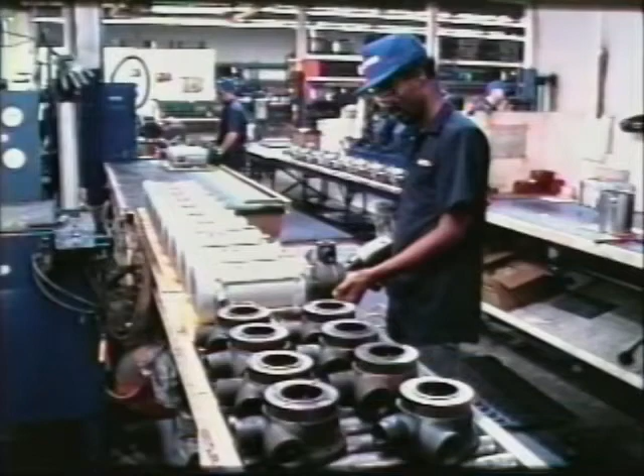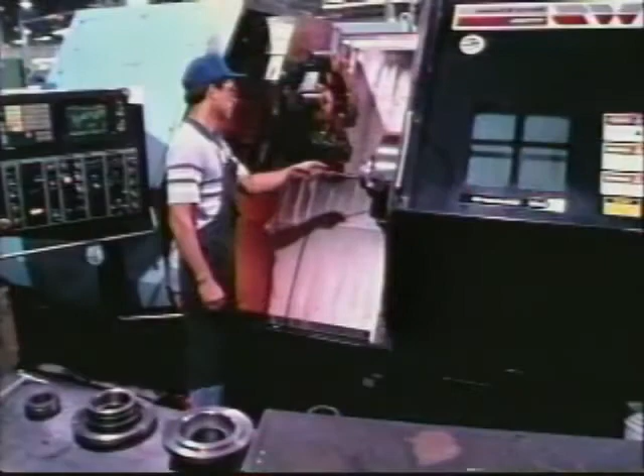Located in Oklahoma City, Oklahoma, CORKEN was founded in 1924 as a water pump distributor. In the early 1940s, the company entered the liquid gas industry and quickly gained market recognition for its quality line of pumps. CORKEN now has over 50 years' experience in the design and manufacture of liquefied gas pumps and is recognized as a world leader.

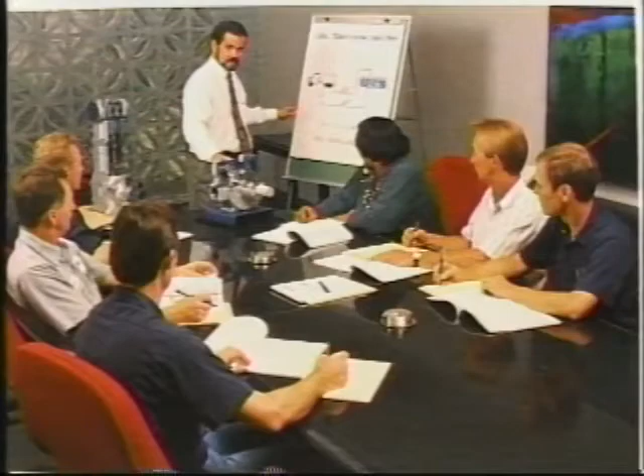Another key to CORKEN's success is its strong commitment to product training. Over the years, CORKEN has held product training seminars all over the world. This training video will explain in detail the proper procedures for disassembly and assembly of the Z-model CORKEN truck pump. The topics covered are safety tips, disassembly, assembly, troubleshooter's guide, tools required for disassembly and assembly, guidelines for installation, and guidelines for proper bypass valve settings.

Safety tips. 1. Periodic inspection and maintenance of CORKEN pumps is essential. 2. Inspection, maintenance, and installation of CORKEN pumps must be made only by experienced, trained, and qualified personnel. 3. Maintenance, use, and installation of CORKEN pumps must comply with CORKEN instructions, applicable codes, and safety standards.

4. Transfer of toxic, dangerous, flammable, or explosive substances using CORKEN products is at the user's risk, and equipment should be operated only by qualified personnel according to applicable codes and safety standards. Be sure to obtain and review all applicable instruction books and service manual pages before starting any of the following maintenance procedures.

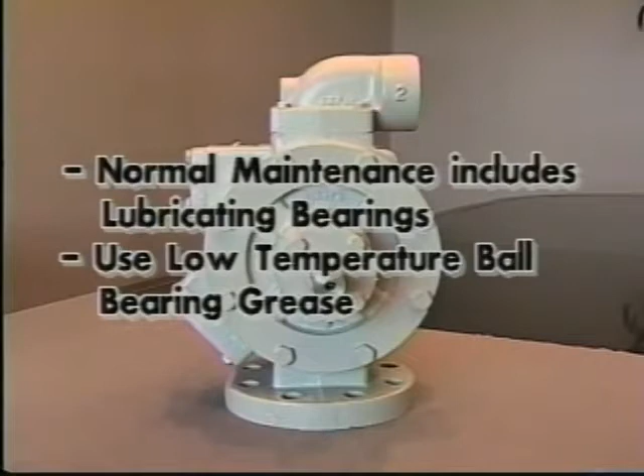This video is on the maintenance and repair of the Z-series pumps. This specific pump is a Z3200, but the pumps and parts and procedures are the same for the Z2000 and Z4200. Normal maintenance is only the lubricating of the bearings. This should be done every 2 to 3 months or as frequently as the truck is lubricated. Remember to lubricate the bearings and slip joints of the pump PTO drive shaft. Use a low temperature ball bearing grease similar to CORKEN part number 2302.

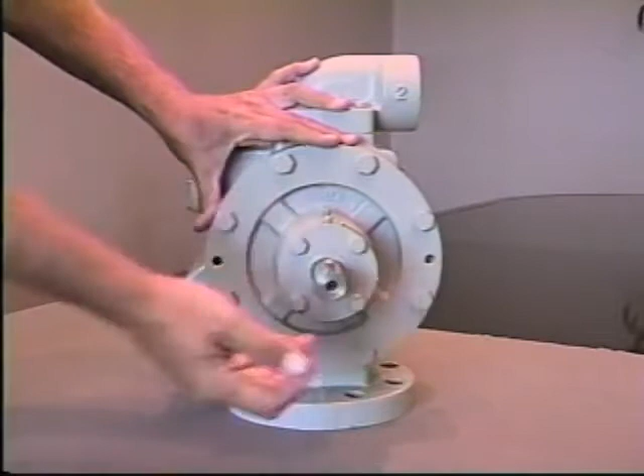Clean the grease fittings before lubrication. Be sure the relief is free to move on the bottom of the bearing cap prior to lubrication. The second relief fitting is where a seal leak would appear. Before disassembly, if there's a seal leak, inspect the bearings by being sure there's no movement in the shaft. If there's no movement, then the only thing necessary to remove will be the head assembly. The bearing area can stay complete.

Okay, to begin with, we're going to show the procedure for the seal change. The seal's the same on both sides of the pump. Before disassembly, check the shaft for movement. Be sure to check if there's any movement. If so, it's necessary to change the main bearings during the seal change. If there's no movement, it's not necessary to remove the bearing cap area or the bearings themselves.

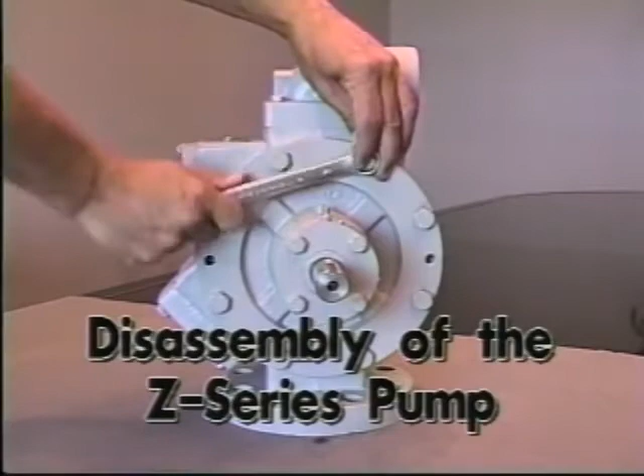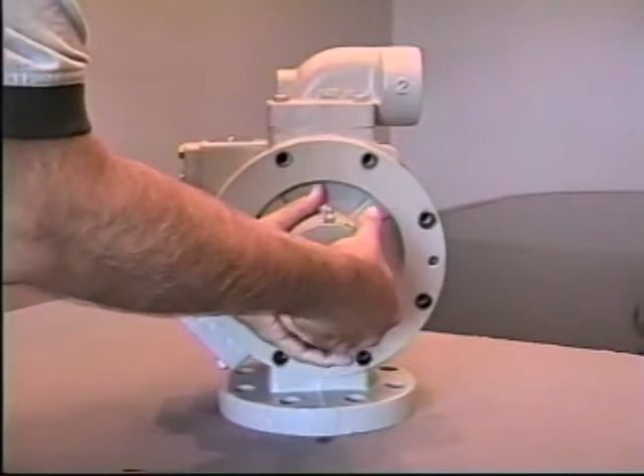To begin with, again, we're going to remove the head bolts, being sure before any maintenance is done that the pump has been depressurized. Remove all head bolts and lay aside. After removal of the bolts, while holding in on the pump shaft, remove the head assembly and set aside.

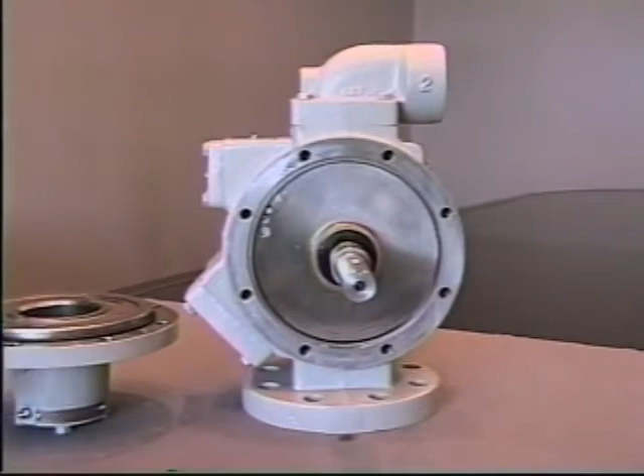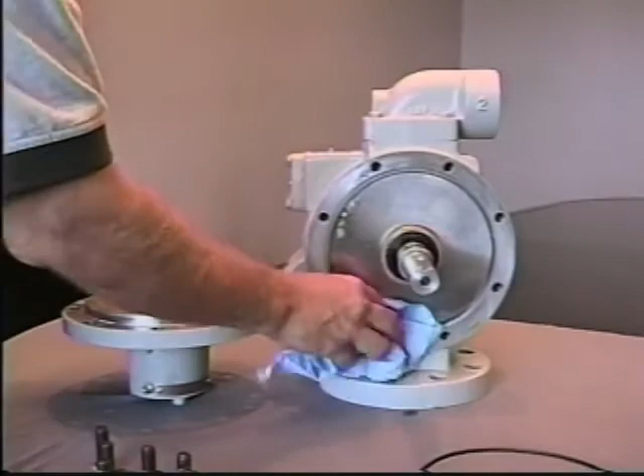Next, you'll want to remove the O-ring from the head and clean the area around the casing and head assembly before reassembly. Remove the spring and carbon from the shaft and set aside. Clean the shaft area before reinstalling the new spring and carbon assembly.

Next, we'll invert the head on the bench, insert a screwdriver through the head and lightly tap out the seal seat. This is the metal seal seat portion of the mechanical seal. It needs to be removed and discarded.

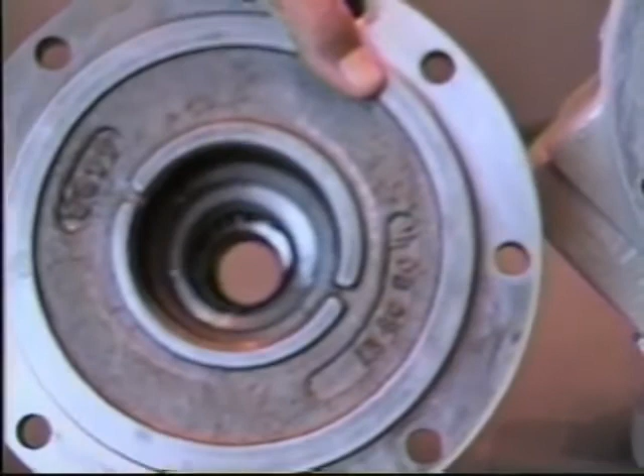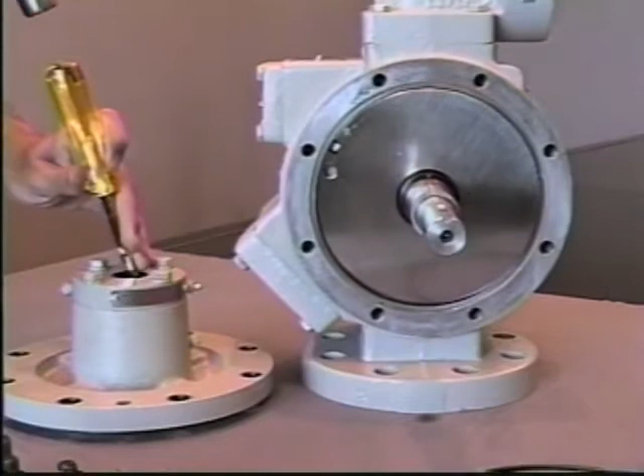You'll also note on the inside of the head assembly a lip seal on the internal part. It may be necessary to inspect and replace that lip seal assembly, which again, you invert the head using a screwdriver. You lightly tap out the lip seal assembly and install a new seal. The lip seal assembly comes with a new mechanical seal, and before installing the parts, you want to be sure and clean the internal area of the head.

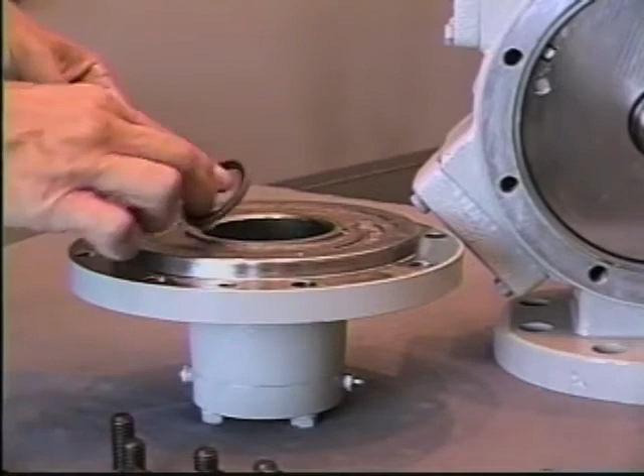Okay, again, after the cleaning of the inside of the head assembly, to reinstall the new lip seal, be sure that it's positioned to where the lip is towards the seal seat. Position it in the head. Using the old seal seat, remove the O-ring from the outside so it fits loosely in the head, and it will be used to lightly tap in the lip seal. Again, lightly tapping in.

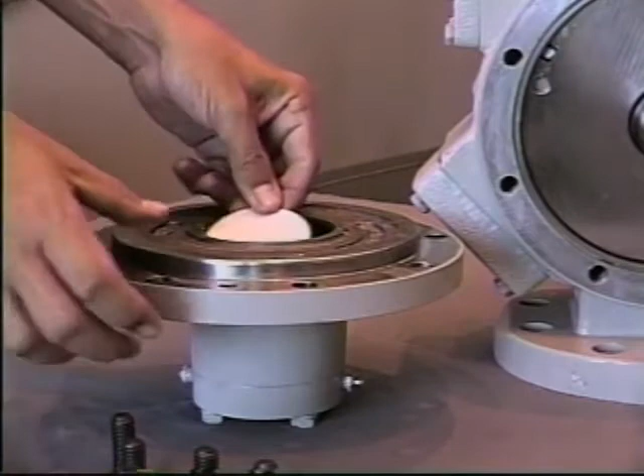Once the lip seal has been installed, remove the old seal seat. Again, cleaning out the head area, getting your new seal seat assembly, lightly lubricating the outside, installing the seal seat in, using the protective cardboard disc, gently press in using just finger pressure. Once the seal seat has been installed, you'll go back and use the spring assembly and carbon to be installed on the shaft.

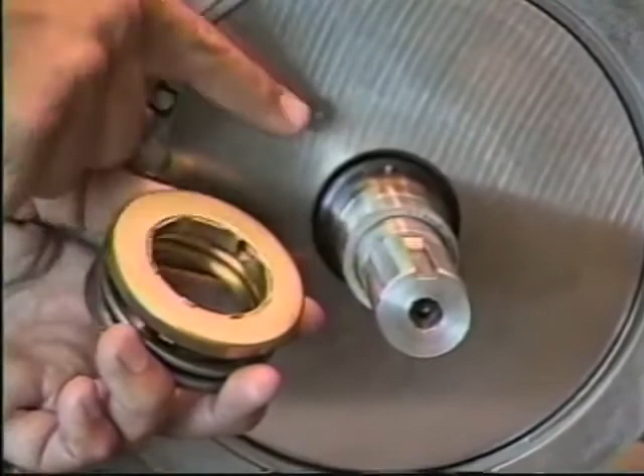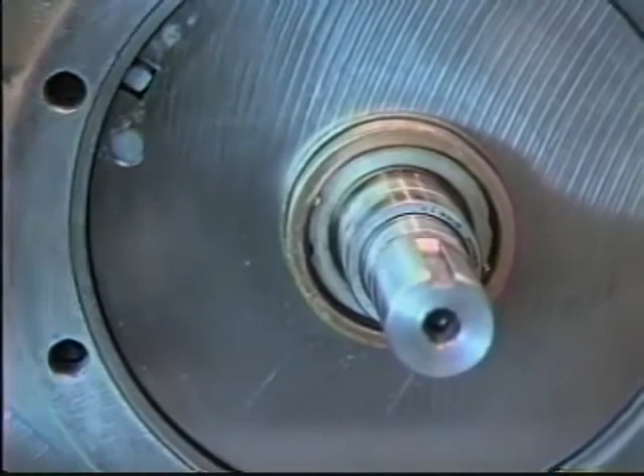Again, after you've installed the seal seat, it's necessary to install the carbon and spring assembly. There is an alignment point where it's necessary to line up the notch in the spring retainer assembly with the pin on the shaft. The pin on the shaft should be aligned in line with the keyway. To install the spring, again, install the spring by itself. It should fit loosely on the shaft. Next, you would take the carbon with the carbon O-ring, lightly lubricating with some spray lubricant or WD-40, installing it over the spring retainer.

Once that's been done, you'll go to installing the O-ring on the head assembly, again cleaning the head assembly and the casing to be sure there's no dirt or debris. Install the O-ring over the head. Lightly lubricate the seal faces to rinse off any dirt or debris that may have accumulated, and carefully install the head assembly over the shaft, watching that the shaft does not hit the seal seat.

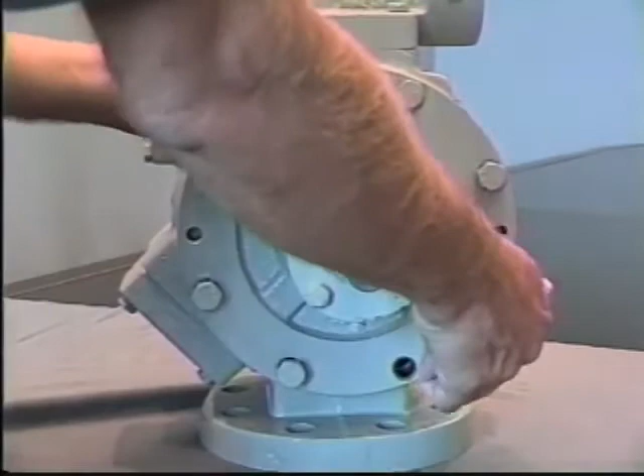Install the head bolts. Tighten the head bolts in a crossing pattern. It's not necessary to torque, but do be sure the bolts are tightened. And before pressurization, always rotate the pump shaft to align seals. And always remember to pressure with vapor.

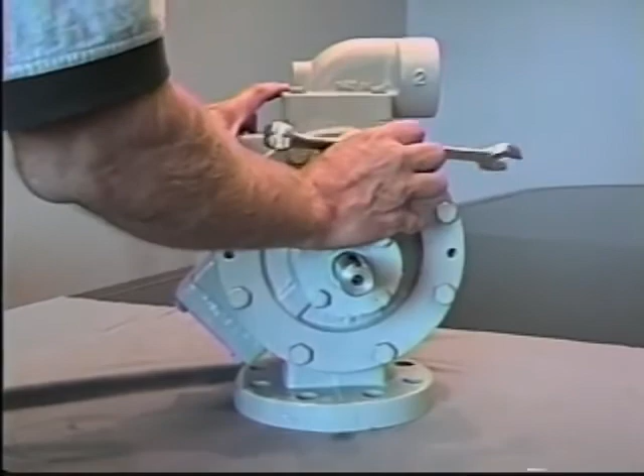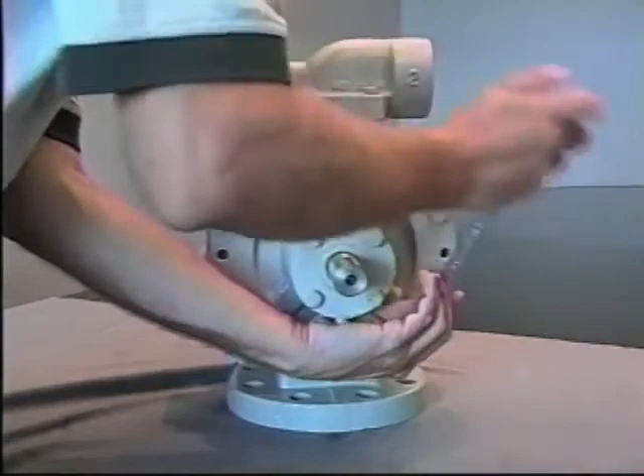If it's on a tank that's mounted with an internal type valve, it may be necessary to allow a small amount of liquid to enter the pump, closing the valve to let the liquid then vaporize. Tighten bolts. Again, in a crossing pattern. And pressurize the pump slowly after rotating and pressure with vapor. The pump should be able to rotate, and be sure to lubricate the pump before putting back into service.

If the pump is going to be put onto the shelf for storage, it's wise to protectively coat the inside of the pump with a light oil spray lubricant and then cap off all openings. That's all that's necessary in the seal change in the Z-Series pumps. If it's necessary to go into the pump further for further maintenance or repairs, we'll continue the video showing that part.

To do a complete rebuild on a Z-Series pump, it's necessary to disassemble the entire pump to repair the internals. You would again remove the head assembly, setting it aside, removing the carbon spring assembly from the shaft. This gives you access to the inside of the pump, removing the wear plate. If it's only necessary to inspect blades, it would be possible then to remove a blade for inspection and reinstall, or as the pump is rotated, you could change one blade at a time.

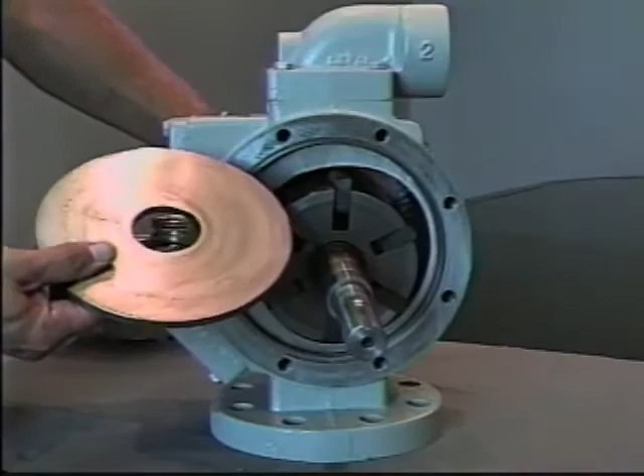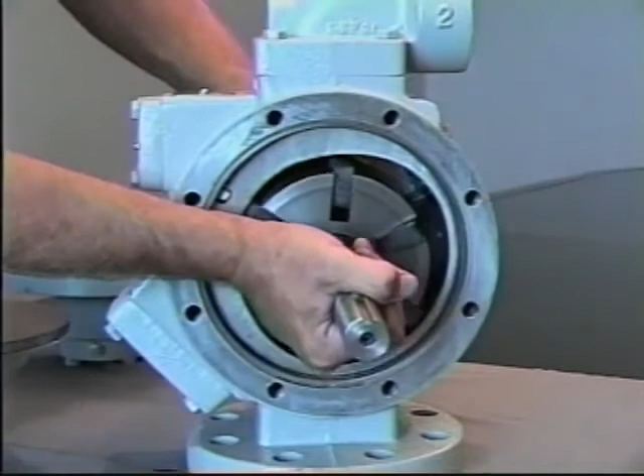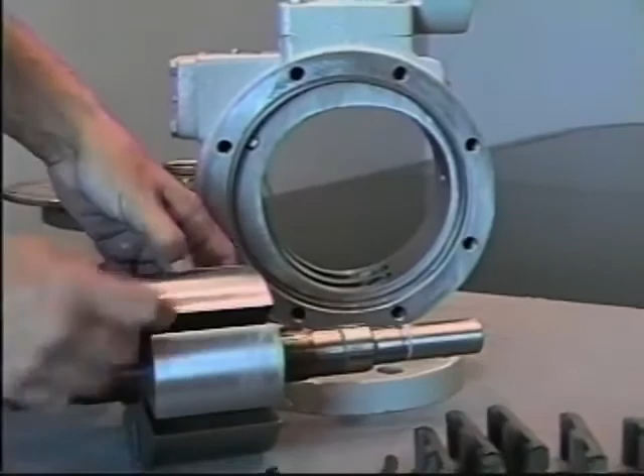It's now possible to remove the rotor shaft assembly along with all the blades and the wear plates or side plates. The side plates are flat, can be reversed for dual usage. If there's light scoring, it's possible to reuse or completely change out and reverse. The wear plates or side plates on both sides are the same. You can then remove the rotor shaft assembly along with all the blades. Inspect the blades and the pins, which come in a new kit.

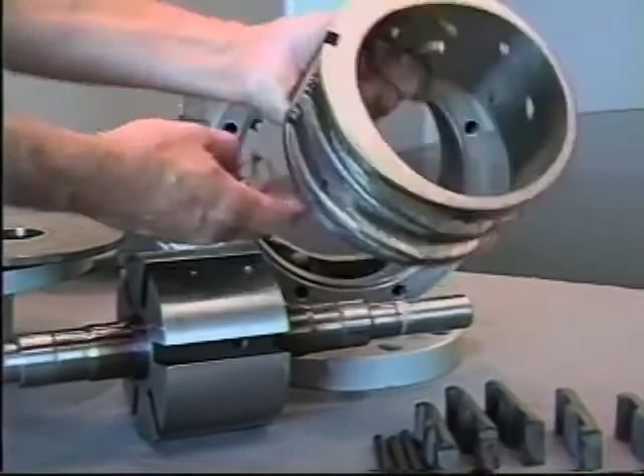Also, the cam can be slid out if necessary. A piece of wood or a mallet can be used to drive the cam assembly from the casing. The cam should be installed properly with the large openings or the inlet side to the inlet side of the pump and the outlet to the outlet side of the pump. Be sure on the reinstallation that the cam is properly installed into the pump casing.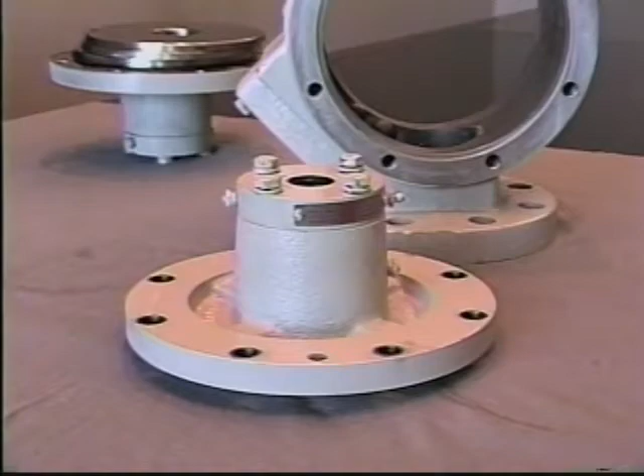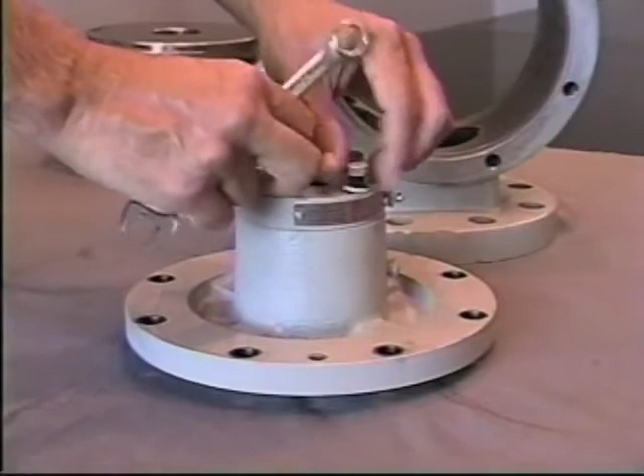Next, we're going to talk about the bearing area in each head assembly. First, you'll need to remove the bearing cap bolts. This is again only necessary if the shaft shows signs of movement or you're doing a complete rebuild where you want to change all the parts. You want to remove all the bearing cap bolts, and then the bearing cap will come off.

You'll note colored shims. These shims are used for adjusting the thrust bearing clearance. Normally you'll just replace the shims that came on the existing pump when you reassemble, keeping the same shims to the same side. If you need to completely rebuild the pump and begin shimming over, we'll discuss that at a later point during the reassembly of the pump. Next, you'll notice the thrust bearing along with the thrust bearing mounting ring. Again, these parts come in both the repair kit and the rebuild kit.

The only remaining part in the head assembly is the main shaft bearing, and it can be removed by removing the spiral snap ring and driving the bearing out from the reverse side. To reassemble, you would then place the bearing, inserting the bearing into the shaft, and reinstall the retainer assembly. It is possible to pre-pack the bearing, although it's not absolutely necessary. Once the pump's rebuilt, if you grease the pump properly, it'll grease the bearings adequately.

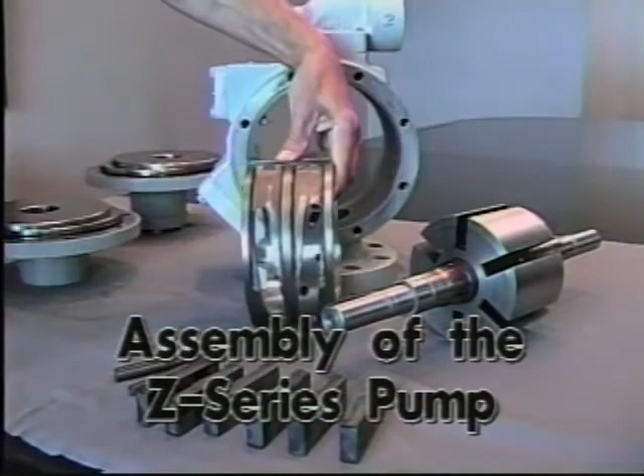Now we're going to begin the process of the reassembly. The first thing you need to do is install the cam, again assuring that the inlet side is towards the inlet and the outlet side is towards the outlet. In this case, the inlet's on the bottom, the outlet's on the top. You'll notice the cam key, and it is required to get your alignment. The cam may need to be lightly tapped in, either using a mallet or a piece of wood.

Needs to be installed approximately the middle of the casing for assembly purposes. Next, you'll take the rotor shaft assembly, installing 3 blades, noting the direction of rotation on the pump. It's important that the blades are installed to where the front edge of the blade picks up the liquid in rotation. In this case, this pump rotates in a counterclockwise direction, so the blades would be installed with the notch to the leading edge. So now we'll install the blades in this direction.

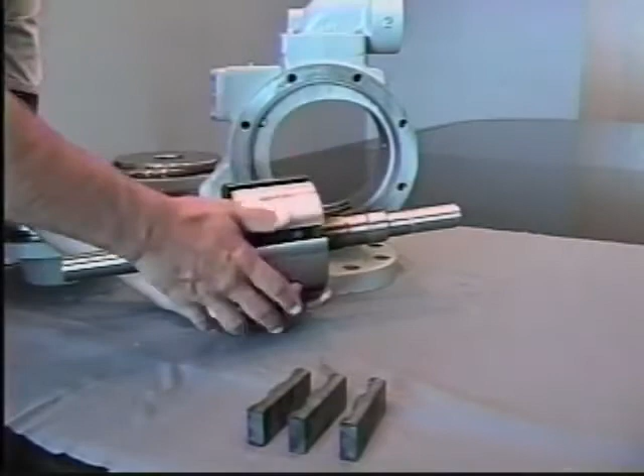Install 3 blades. This is just to assist in keeping the pins in the rotor and shaft assembly during installation. Install the 3 pins or drivers. Now laying the rotor shaft assembly inside the cam.

Next, you can install the remaining blades, again noting direction of rotation being counterclockwise. So the leading edge of the blade is again rotating this way. The leading edge of the blade is coming from this direction. You want to make sure the blades are properly installed.

Next, you'll install the side plate or wear plate on one side. It's easier to use a bolt. Noting again where the key is, install the side plate on one side of the pump, aligning with the key.

Then you install the other side plate, which will then support the rotor shaft assembly along with the blades. You can hold the rotor shaft assembly in place with one hand while installing the side plate with the other. Noting the key to lock the side plate in position. Now removing the bolts that were used to assist in the installation of the side plates.

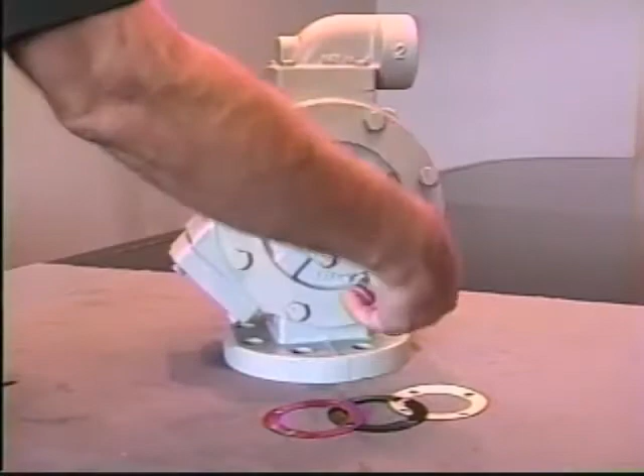The way that's done is by installing the thrust bearing assembly, starting with the mounting ring over the shaft, installing the thrust bearing along with the two thrust washers, and installing the bearing cap with no shims installed over the shaft, and bolting down just with light finger pressure. After the bolts have been installed, you then check the clearance between the bearing cap and the main head.

On the first side, you would check what the clearance is and add a total of 6 thousandths. On the second side, you would check the bearing clearance and add a total of 2 thousandths. So in this case, it is the second side. So we're looking for the clearance in the pump. In this case, it's approximately 20 thousandths. So we would add a total of 22 thousandths worth of shims.

The shims are color coded. The yellow shim being 20 thousandths, the brown shim being 10, and the red shim being 2. So in this case, we'll install a yellow shim, which is 20, and a red shim, which is 2, for a total of 22 thousandths clearance. That will set the rotor into a floating position to keep it from rubbing against the side plates.

Once the shims have been installed and the bearing cap is reinstalled, you tighten the bolts down to a torque of approximately 25 foot-pounds. Again, tightening bolts in a crossing pattern. Once the bearing caps have been tightened, you would rotate the pump to assure that it is free turning, and then lubricate the pump before putting it into service.

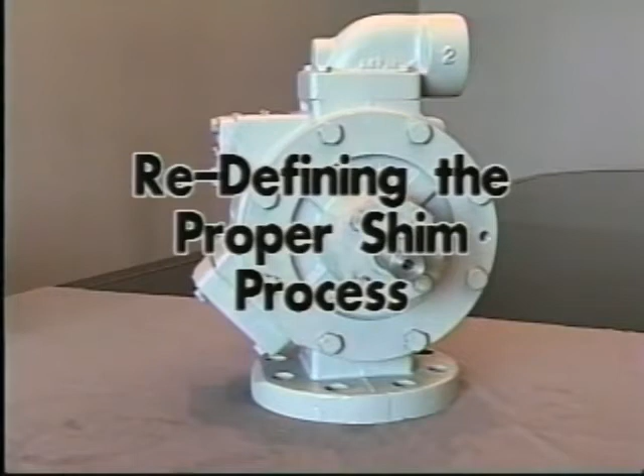To redefine the proper shimming of a new pump, you begin with the first side by tightening the bearing cap down by hand, checking the clearance between the bearing cap and the head, whatever that clearance is, adding a total of 6 thousandths more, going to the second side, tightening the bearing cap down by hand, checking the clearance and installing a total of 2 thousandths more.

As an example, if the first side had a clearance of 18 thousandths, you would make a total of 24 thousandths worth of shims. The second side, you would then add 2 thousandths to whatever that clearance might be, which could be 24 thousandths. You would give it a total of 26 thousandths worth of shims. That would give you the proper clearance of the internal rotor.

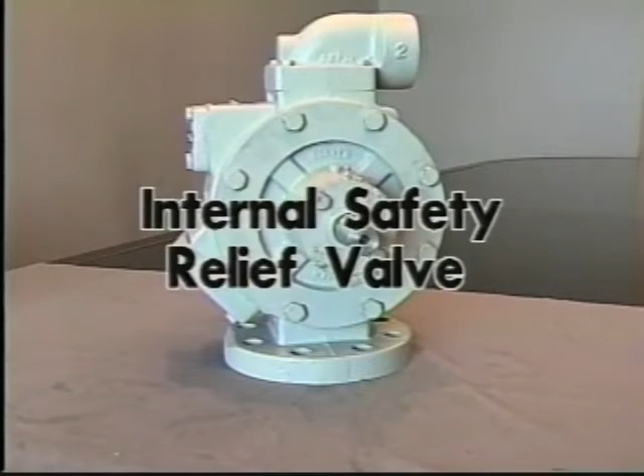We now want to talk about the internal safety relief on the pump. Normally this part of the pump doesn't require maintenance, although it is a good idea to inspect this area. It is a safety relief, not a bypass valve. Its purpose is solely for the protection of the pump from overpressurization. The best way to inspect it is being careful. You remove 2 bolts from opposite sides of the bearing cap.

Once those bolts are removed, you would then use either an all-thread or a longer bolt, as this plate will be under spring pressure. You can use something similar to a shipping carriage bolt or an all-thread, installing them in the opposite sides. Then removing the other 2 bolts, which will then let you slowly relieve the spring tension on the relief valve. Again, taking care to use either all threads or a longer bolt to relieve the spring tension.

Once this has been achieved, you would then inspect the bearing or the relief valve area for any signs of wear or rust. If this area has rust or the relief valve itself is stuck in the casing, it's necessary to clean that area up, either with a wire brush or some type of emery. If there's any signs of wear between the relief valve or the seat of the casing itself, this is a sign of overpressuring, normally caused by excessive bypass setting or running the pump at an excessive pressure.

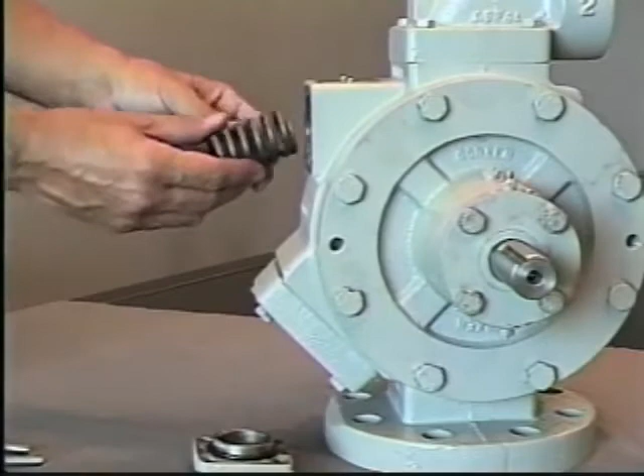Again, after the removal of the cap and the spring, you'll find the relief valve itself should show no signs of wear in the seat area or inside the casing. If there's indications of some type of wear in this area, that would be an indication of overpressurization. To reinstall this, you would then clean this area up, reinstall the seat and the spring and the bearing cap, and again, using the extended bolts, this would give you access to be able to compress the spring slowly during the assembly process.

This can be done again with either carriage bolts, all thread, or just a longer bolt, using the cross corners to get the cap and spring tightened enough to be able to install the standard length bolts.

There is an O-ring that seals between this plate and the casing. If you ever have a leak between the plate and the casing, it would be the O-ring. That does come in both the repair kit and the rebuild kit. You would just reinstall and clean those surface areas before the installation of the relief valve cap. Tightening the relief valve cap in an even manner slowly compresses the spring. It is preset from the factory and requires no adjustment. And that's all that's required for inspection of the relief valve.

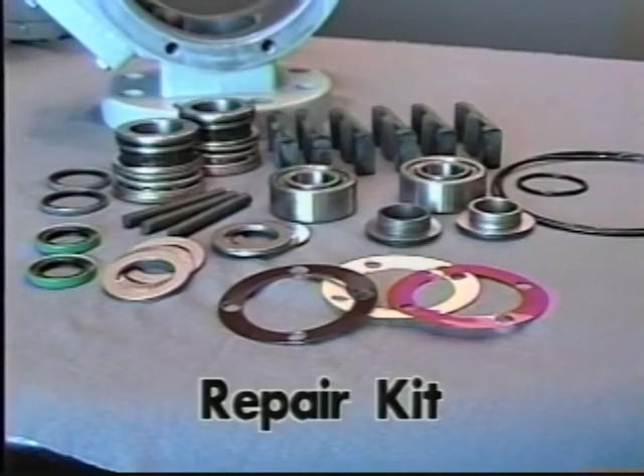When you get a repair kit, you get 6 blades, 2 mechanical seal assemblies that include the 2 grease seals for between the bearing and the mechanical seal. You also get 2 grease seals for the outside of the shaft. You get 3 pins for inside the rotor, 2 main shaft bearing assemblies, all of the O-rings for inside the pump, 2 thrust bearing mounting rings along with the 2 thrust bearings. You also get adjustment shims, 2 each of the 20 thousandths, 10 thousandths, and 2 thousandths thrust bearing shims. That all comes in a repair kit.

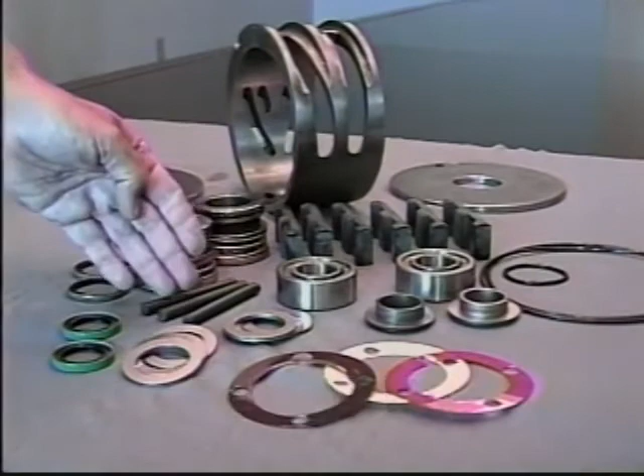A rebuild kit gets everything included in a repair kit, but it also includes the cam and the side plates. So in a rebuild kit you would get the cam, the 2 side plates, along with the 6 blades, the 2 mechanical seals with the grease seals that go between the mechanical seal and the bearing, the 2 grease seals for the main shaft, the 3 pins, the 2 main shaft bearing assemblies, all the O-rings for the pumps, the 2 thrust bearing mounting rings along with the 2 thrust bearings, and again 2 of each of the thrust bearing shims, the 2 thousandths, 10 thousandths, and 20 thousandths thrust bearing shims are all included in a rebuild kit.

This completes the process of the rebuilding of the Z-Series pumps. Again, this being an example of a Z3200, but the process is the same whether it be a 2000, 3200 series, or 4200 series pump.

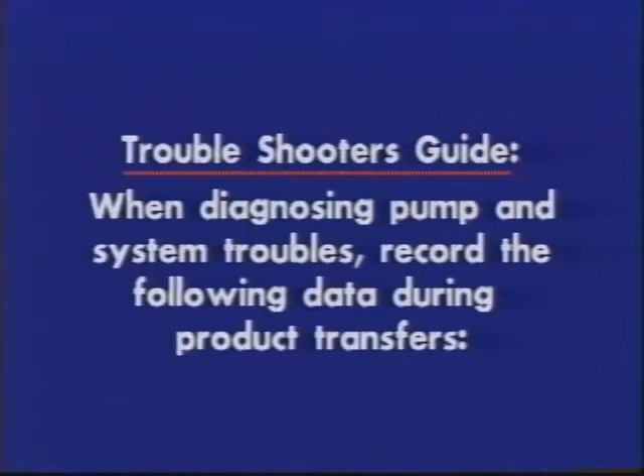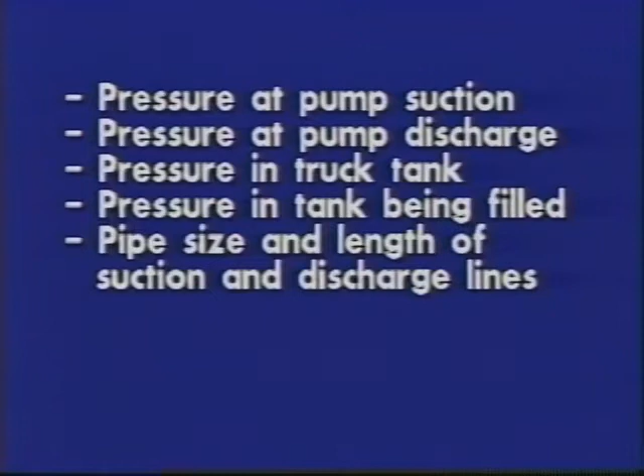When diagnosing pump and system troubles, record the following data during product transfers: pressure at pump suction, pressure at pump discharge, pressure in truck tank, pressure in tank being filled, pipe size and length of suction and discharge lines, size and length of vapor equalizing line, and pump speed.

Problem: low capacity. Cause: pump speed too slow. What to do? Confirm pump speed. Consult pump performance curve. Cause: high differential pressure. What to do? Restriction in discharge piping or hose too small. Vapor equalization lines too small or not used. Remove restriction or modify piping.

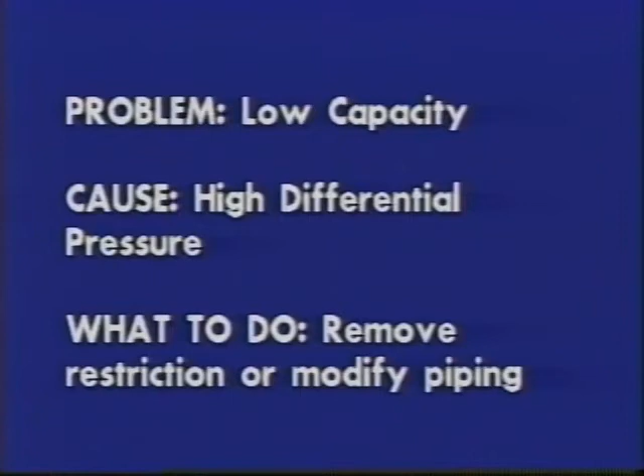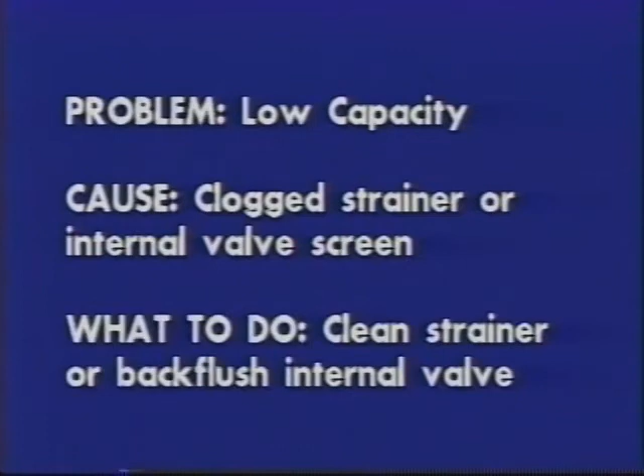Cause: external bypass valve is leaking through, stuck open, or set too low. What to do? Readjust, repair, or replace valve. Cause: clogged strainer or internal valve screen. What to do? Clean strainer or backflush internal valve. Cause: suction pipe too small or restricted. What to do? Remove restriction or modify piping. Cause: worn blades or vanes.

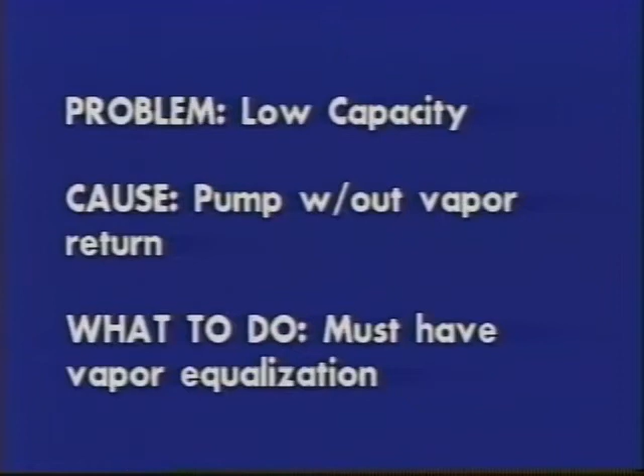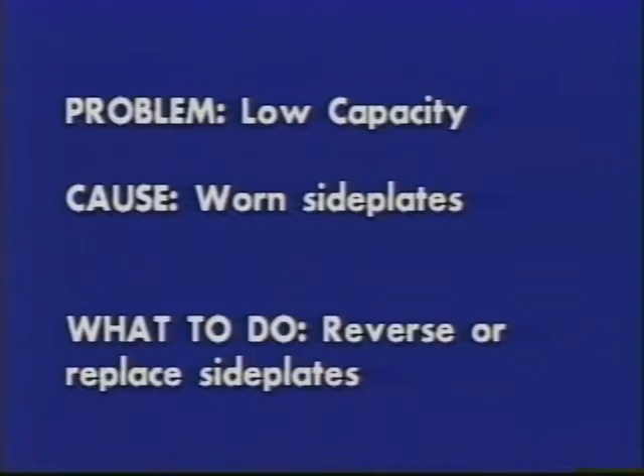What to do? Replace. Problem: low capacity. Cause: pump without vapor return. What to do? Without vapor equalization, a pump can remove only about 3% of the truck tank capacity per minute without severe cavitation and capacity loss. Cause: worn side plates. What to do? Reverse or replace side plates. Check universal drive assembly to make sure angularity is within limits, yokes are parallel and slip joint is greased. Check bearings.

Cause: blades or vanes are sticking. What to do? Remove the blades or vanes and clear out foreign matter. Check the strainer. Replace the blades or vanes if necessary. Problem: pump runs but no flow. Cause: valve closed. What to do? Check valve. Make sure internal tank excess flow valve is open. Refer to manufacturer's instructions. Cause: excess flow valve slugged. What to do? Stop pump until valve opens. If problem continues, slow pump down or install new or larger excess flow valve.

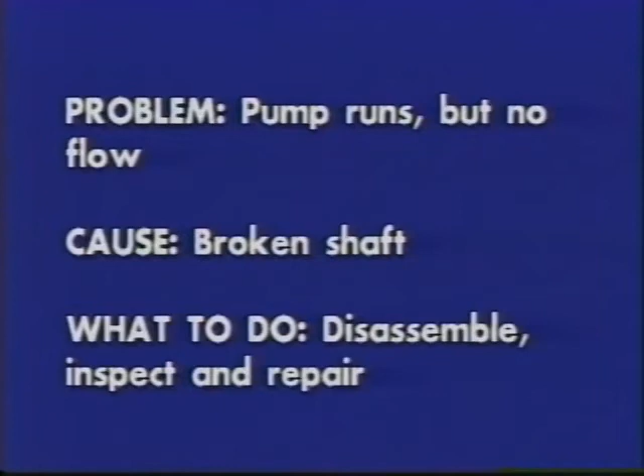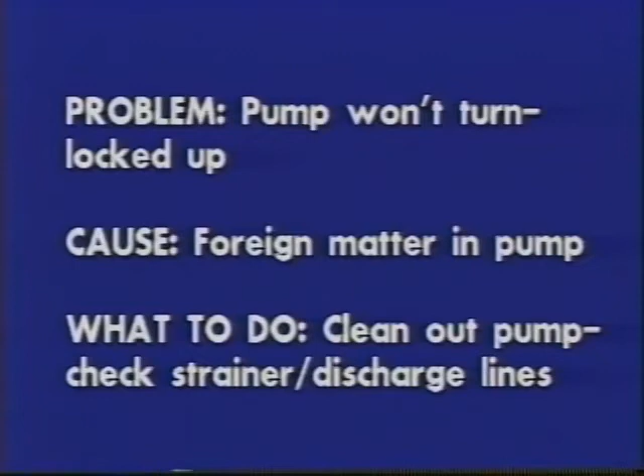Cause: broken shaft. What to do? Disassemble and inspect pump. Repair if necessary. Cause: defective meter. What to do? Service the meter. Problem: pump won't turn, locked up. Cause: foreign matter in pump. What to do? Clean out the pump. Check strainer in suction and discharge lines. Cause: blades broken. What to do? Clean out pump carefully and replace blades or vanes. Has pump been operated dry? Then check for damage to cam and rotor shaft assembly.

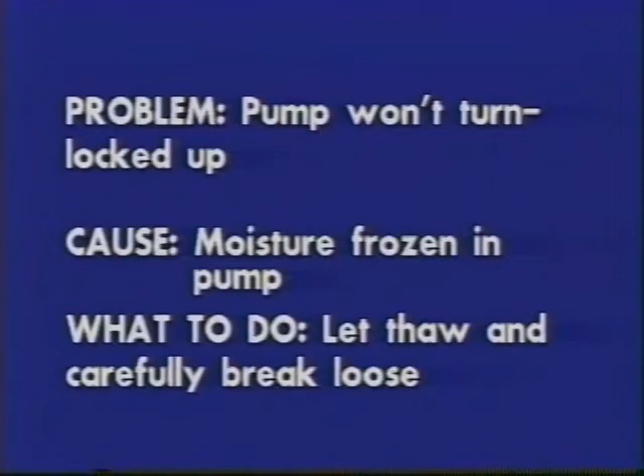Cause: bearing seized. What to do? Replace pump bearings. Grease monthly. Use ball bearing grease manufactured for intended service. Cause: moisture frozen in pump. What to do? Let thaw and break loose carefully. Add alcohol to the tank on LP gas. Check with product supplier about the possibility of water in gas.

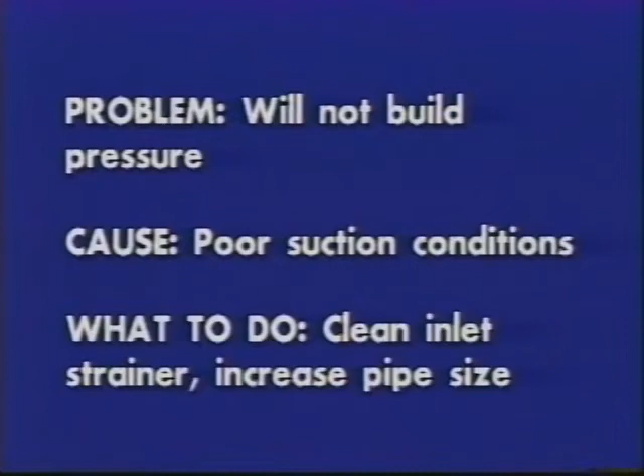Problem: will not build pressure. Cause: poor suction conditions. What to do? Clean inlet strainer. Increase pipe size. Cause: external bypass valve is set too low. What to do? Set valve for higher pressure. See instructions. Cause: worn blades or vanes and/or side plates. What to do? Disassemble, inspect, and repair as necessary.

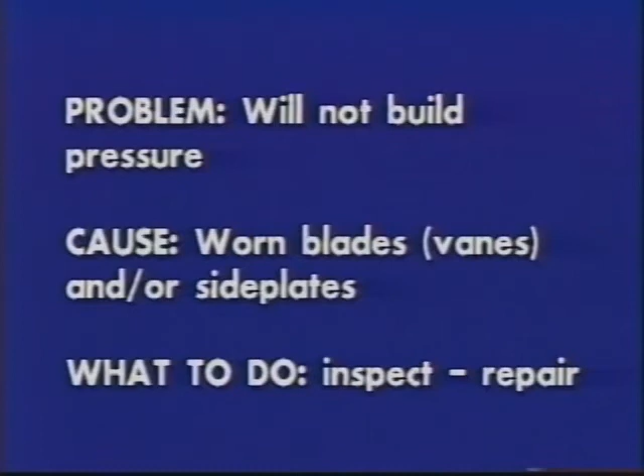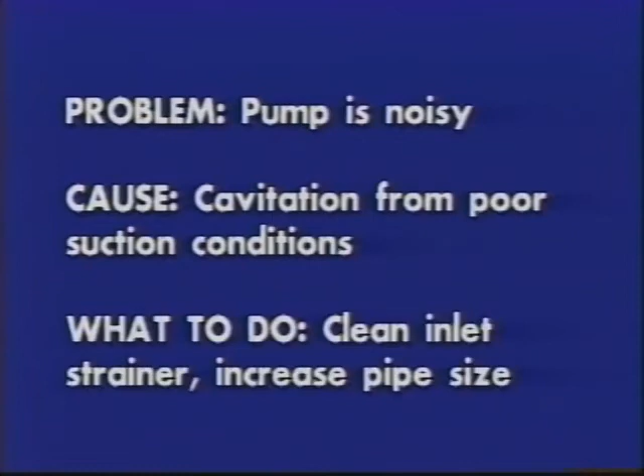Problem: pump is noisy. The cause: cavitation from poor suction conditions. What to do? Clean inlet strainer. Increase pipe size. Cause: blades or vanes sticking. What to do? Remove blades or vanes and clean out foreign material. Replace blades or vanes if necessary. Cause: bearings worn. What to do? Replace if necessary. Grease monthly or during truck maintenance.

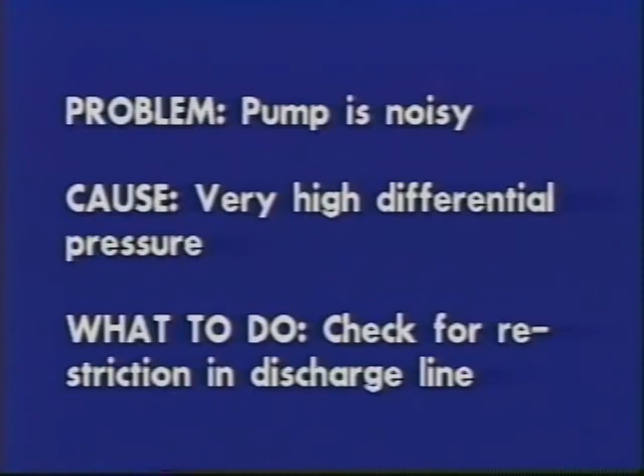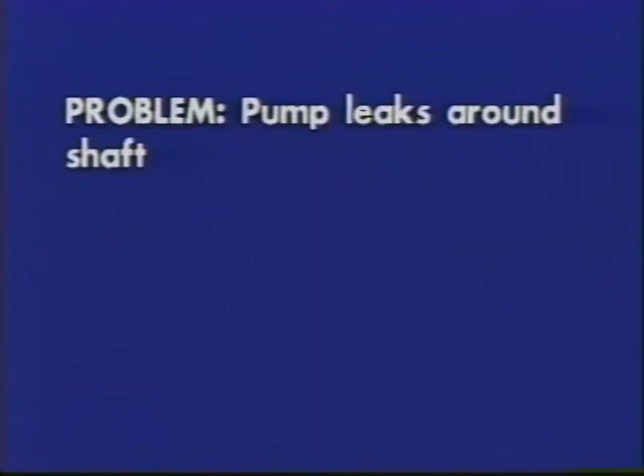Cause: very high differential pressure. What to do? Check for restriction in discharge line. Delivery hose too small and too long. Slow down the pump. Cause: PTO shaft vibration. What to do? Inspect and repair driveline components. Problem: pump leaks around the shaft. Cause: seal or O-rings failed. What to do? Inspect seal assembly and replace if necessary. Keep new seal very clean. A light oil film is recommended for sealing surfaces prior to installation.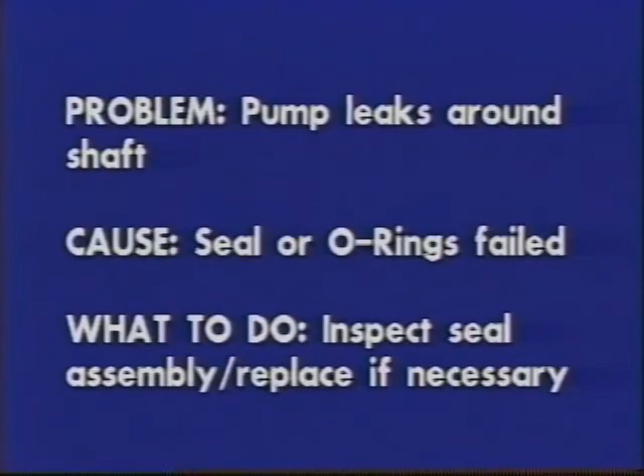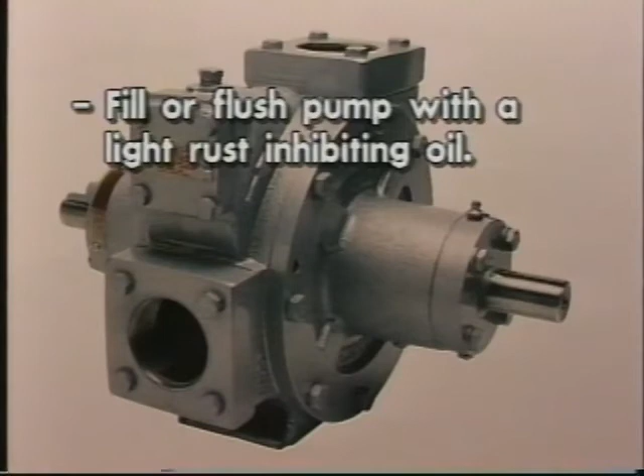Storage of Z-model Coro-Vane truck pumps. If your Corken Z-model pump is to be removed from service for some time, the pump must be protected, as propane, butane, and anhydrous ammonia all leave the metal bare and open to corrosion. Piping and tanks not in service should also be protected, as the rust particles can destroy the pump seals almost immediately after startup. First, fill or thoroughly flush the pump with a light rust-inhibiting oil. If the pump is flushed with oil, placing some desiccant packets inside the pump will provide added protection.

Second, plug all pump openings. Third, store in a dry location. Fourth, before placing the pump back into service, drain the oil and remove any desiccant packets. Fifth, refer to the Operation of your Pump System section of the manual.

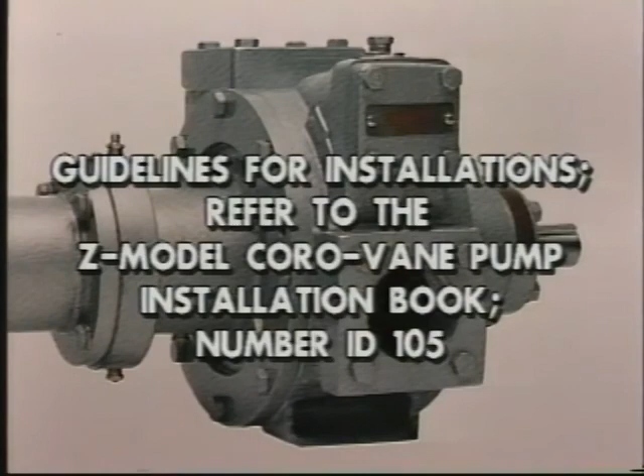Tools required for disassembly and assembly of the pump: a 1/2 inch drive socket set, thickness gauge set, number 2 flathead screwdriver, emery cloth, 320 to 400 grit, light oil or spray lubricant. Guidelines for installations: refer to the Z-model Coro-Vane pump installation book, number ID 105. Guide for bypass valve settings: refer to instruction book and bypass valves.